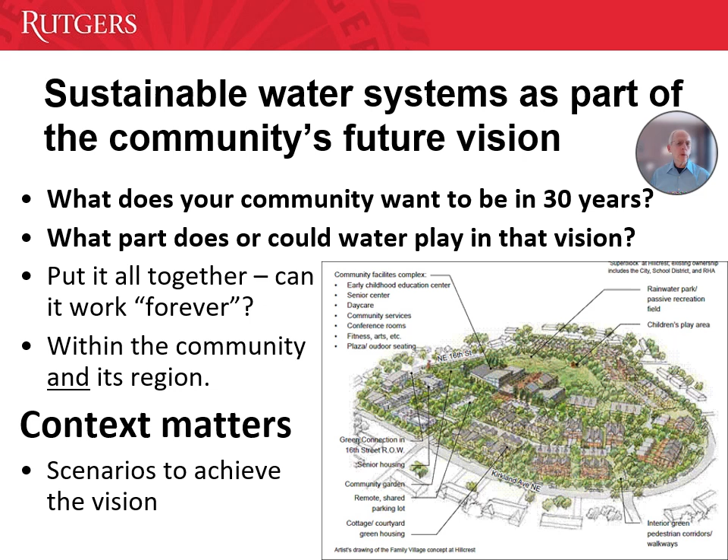So context matters, and one of the things that we can do in water resources management is use scenarios as a way of understanding whether or not we can achieve our vision and whether our vision is sustainable.

So the first question, of course, is what is a watershed? Basically it's the land area that flows to a single surface water outlet. In Westchester County, we're dealing with the Hudson River estuary, so the Peekskill and Haverstraw Bay area, and so on along the west side. Then you have on the far east side the Long Island Sound watersheds, the streams and rivers that run to the Sound directly. And then you have the Croton and Bronx River watersheds, which are especially important in Westchester County because of their historic relationship with New York City.

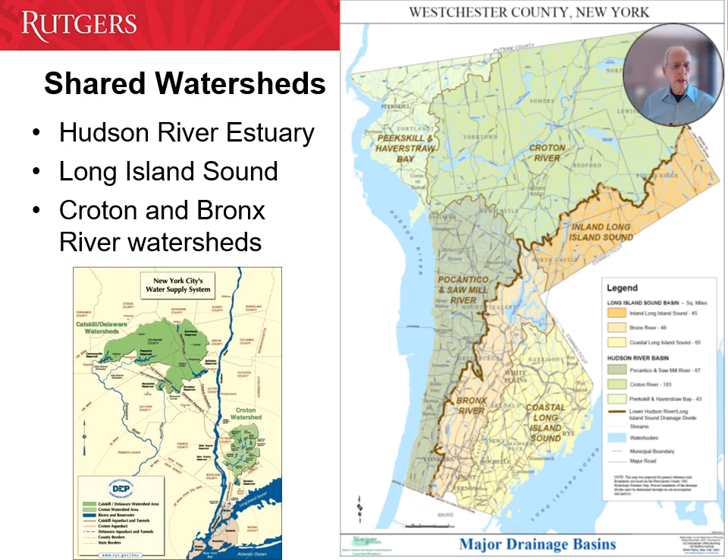One equation, the only equation in this entire presentation, is this one: P equals E plus T plus R plus I. Precipitation is the P. If it doesn't come down from the sky, it's not a water resource that we can deal with. That then moves into the other four parts: evaporation, the water that moves from the land surface directly back up into the sky; transpiration, the water that moves through plants and back up into the atmosphere; runoff, the water that moves directly across the land surface into a surface water; and infiltration, the water that moves down through the land into the subsurface, into what's called groundwater. That's the natural water cycle.

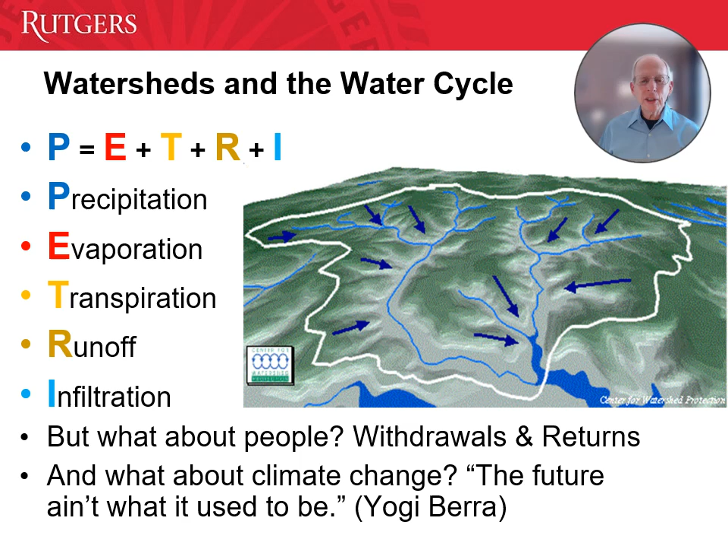People then take from that water cycle. We withdraw water for our own purposes, whether it's potable use in the homes, industrial use, agriculture, lawn irrigation, pools, and so on. And then that water eventually goes back into the system through wastewater treatment plants, evaporation and transpiration, and so on. And then you have the issue of climate change. We know that the climate is changing. We have been measuring it for decades. And as Yogi Berra is quoted as saying, the future ain't what it used to be. So we're going to have to deal with that issue.

A little bit about the New York City water supply system. Back in 1842, when New York City implemented the Croton Aqueduct and started its first major supplies from outside of the city, it was from Westchester County. As part of developing the Croton system, the agreement was that New York City would also supply water to Westchester County, and part of that is from within the county at these reservoirs that you see here. So about 85% of Westchester County residents get their water from the New York City system as part of this deal. And that means that pollutants going into surface waters in the Croton watershed can damage water quality in those reservoirs and part of the Westchester water supply.

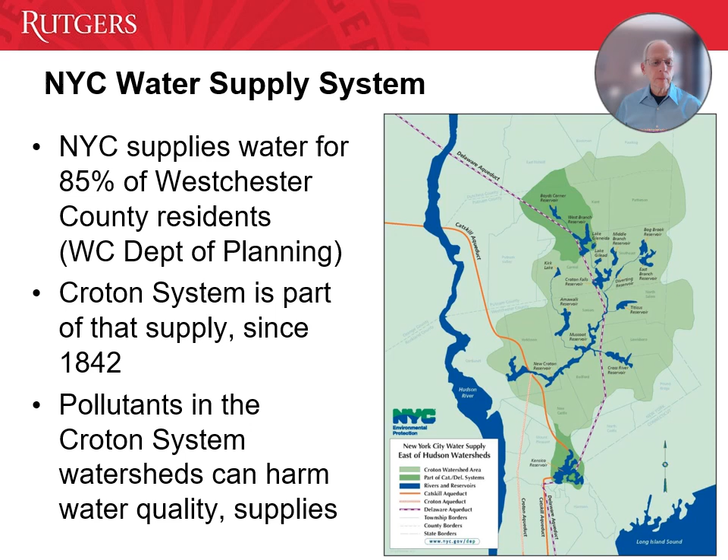So let's take a first look at what we're seeing with regard to climate change. One of the interesting things is that we are seeing more and more of our rain coming in heavier events. Across the northeastern part of the country, it's almost twice as common as it used to be. Total rainfall is not changing all that significantly in this area, but it's coming down in big storms, 2, 3, 4, 5 inches of rain all at once.

On the flip side, the expectation is that droughts are going to become more frequent, at least for the smaller droughts, maybe the less severe droughts. But we're not sure whether the worst droughts we're going to see in the future are any worse than the ones that we have seen in the past, for instance, the 1960s drought.

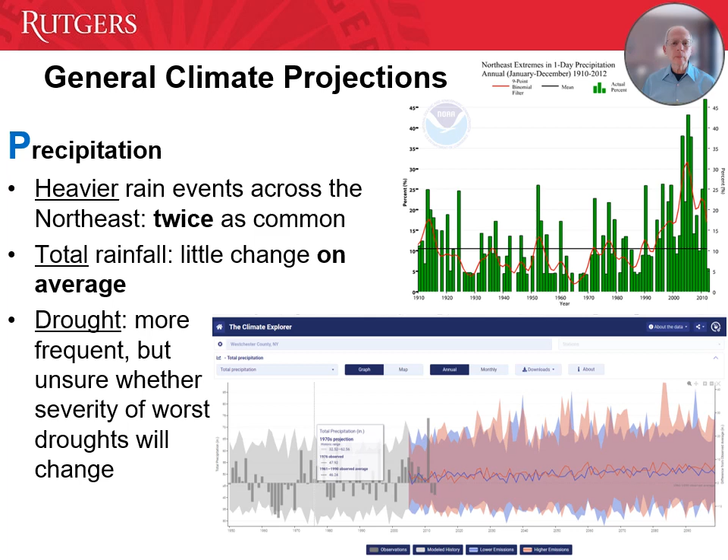With regard to temperatures, it's going up. It's going up in the daytime, it's going up in the nighttime, it's going up faster during the winter months, which we're seeing now in terms of more of our precipitation in rainfall than in snowfall. And all of this means that we're extending the growing season, and that means that we're increasing evaporation and we're increasing transpiration from plants, which has an effect on water supply.

The other thing that we're seeing, and again, this has been documented very, very well, is increasing sea level. So the New York State Department of Environmental Conservation is projecting nearly 3 feet of sea level rise by the year 2100, and that's at a medium projection in terms of climate change. It's not the worst case scenario. It's also not the best case scenario. So if the world gets its act in gear and really clamps down on greenhouse gases, we could see less sea level rise. But a 3-foot sea level rise along the coast is a big issue for these coastal communities.

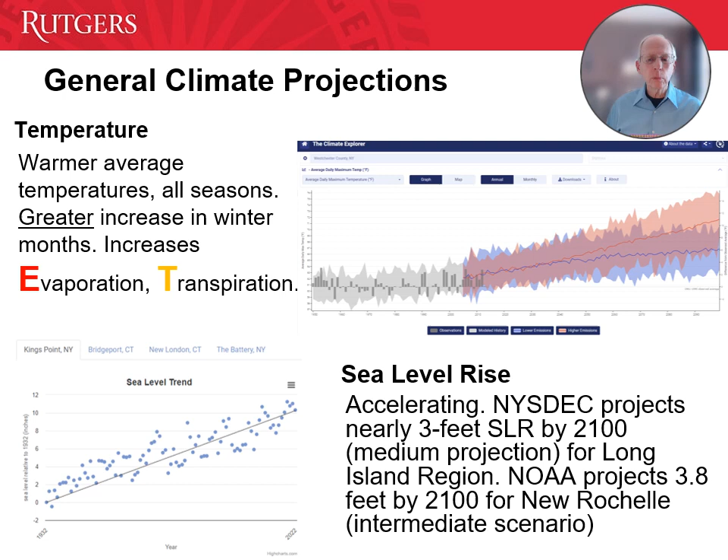When we think about runoff, the R in our equation, stronger storms mean that more of that stormwater is going to run off into our streams, and that is going to create larger peak flows in our smaller streams and rivers. You can see here a graph of the Bronx River at the Botanical Garden, and these large spikes that you see are rainfall events.

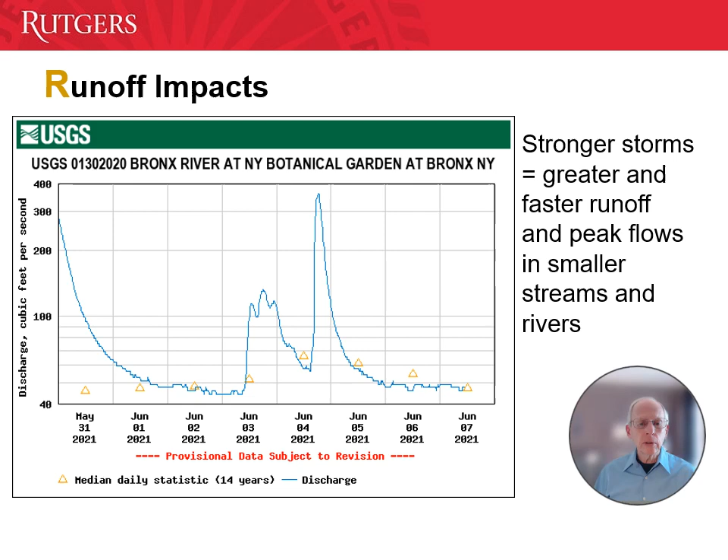And that brings us to infiltration, the final part of our equation. Infiltration is a little harder to understand because it's out of sight, but basically what it means is that water that is coming down is moving through the soil and then finally encounters an area where the soil is completely filled with water. All of the spaces between the soil particles or rocks or whatever it happens to be are filled with water. This is groundwater. And if there is enough groundwater of good enough quality that people can use it through wells, that's an aquifer. So all aquifers are groundwater, but not all groundwater is an aquifer.

That water moves over time to stream systems. And then you discharge out to the stream or out to, for instance, the Long Island Sound or the Hudson Estuary, and then it becomes part of the saltwater system.

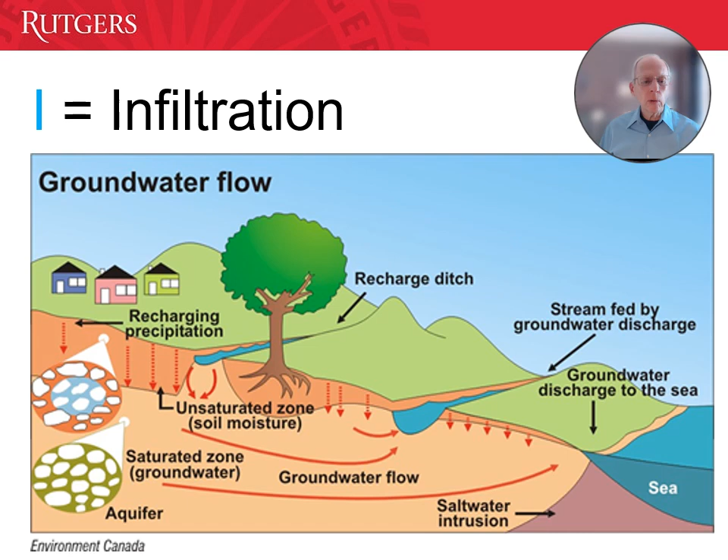So sometimes upstream flows to a gauging station are affected by reservoir releases or wastewater treatment plant releases and so on, and may be affected here at Bronx River. But in general, this is what you're looking for in terms of what's called a stream hydrograph: these low flows are most often groundwater flows.

Development then changes everything. During a natural ground cover, you have relatively little runoff because the land surface is very uneven. There is a lot of vegetation, and so the water tends to stay where it falls. A big chunk goes back up into the atmosphere through evapotranspiration, but then the rest of it goes into the ground through infiltration. As we start developing low density, medium density, and then higher density, what you see is interesting.

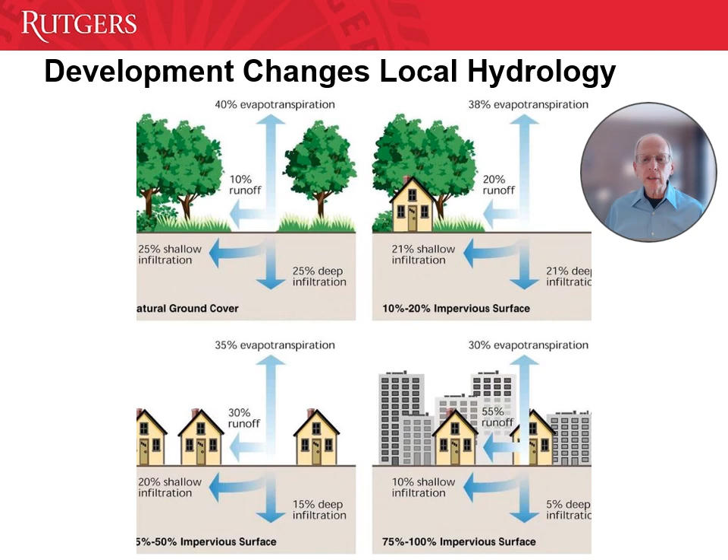You see a great increase in runoff from 10% to maybe over 50% of the water as runoff. You see a significant decrease in infiltration, and you see a bit of a decrease in evapotranspiration. What does that mean? That means that more and more you're going to see peak flows in streams going up, and that means more and more flooding. And it means that the low flows in streams are going down because there's less and less groundwater to support those stream flows.

So let's shift to water quality issues. What is it that pollutes our waterways? And one of the interesting things that people tend not to think about is sediment. Sediment nationally is the #1 pollutant of our streams. Sediment can come from erosion of stream banks, it can come from construction sites, it can come from erosion of stormwater channels, all sorts of different places.

But it has some pretty severe effects on streams because it buries the bottom habitat. All sorts of critters that live in the bottom will then be suffocated. It can change stream structures. It can fill ponds and lakes and wetlands. So for freshwaters and also for estuaries, major impacts from sediment.

And there's a local role that people can play, one of which is to reduce stream erosion. How many people mowed the lawn right down to the water's edge? It's almost like if you don't get your lawnmower wheels wet, you haven't done a good job. Instead of doing that, back up, reinstall natural vegetation, natural species along the water's edge, and reduce the erosion that occurs from that process.

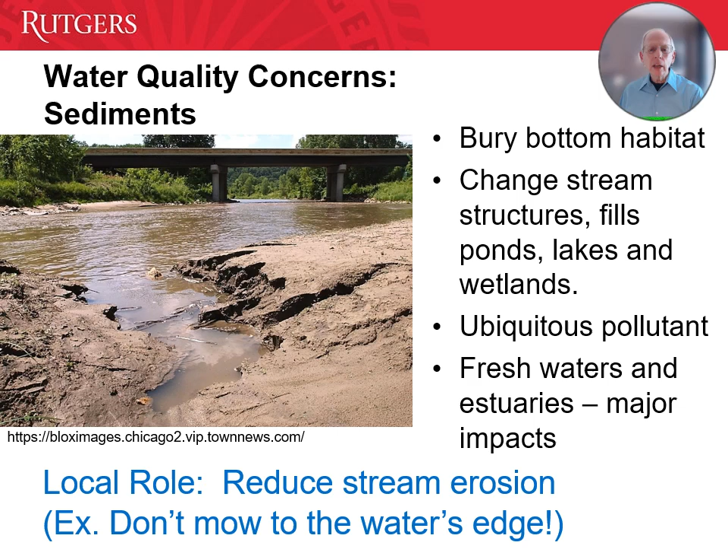Another pollutant of great concern, and this one we see all over the place, solid and floatable materials, everything from plastic bottles to paper wastes from fast food places and plastic bags flying in the air and into our streams. And this has both aesthetic and ecological damages.

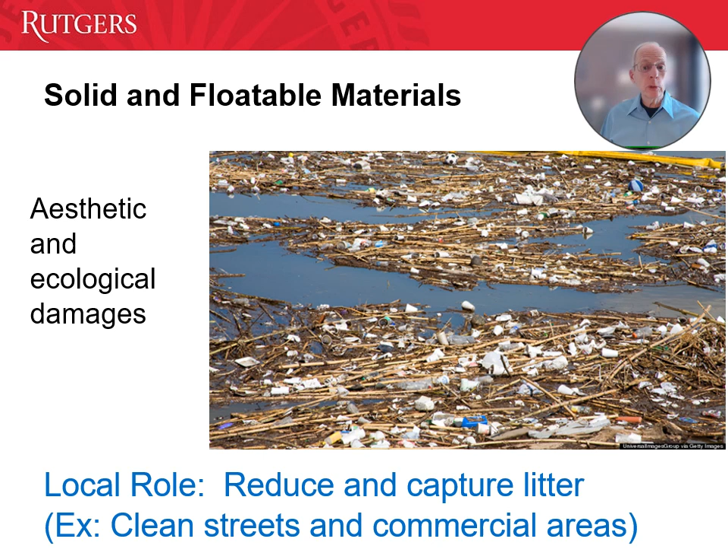So again, there's a local role. You can reduce and capture litter. Clean streets programs, cleaning up commercial areas, reducing the amount of plastic waste. New Jersey, for instance, has banned businesses using plastic bags in many situations. So we're seeing far fewer plastic bags in our streams and hung up in our trees.

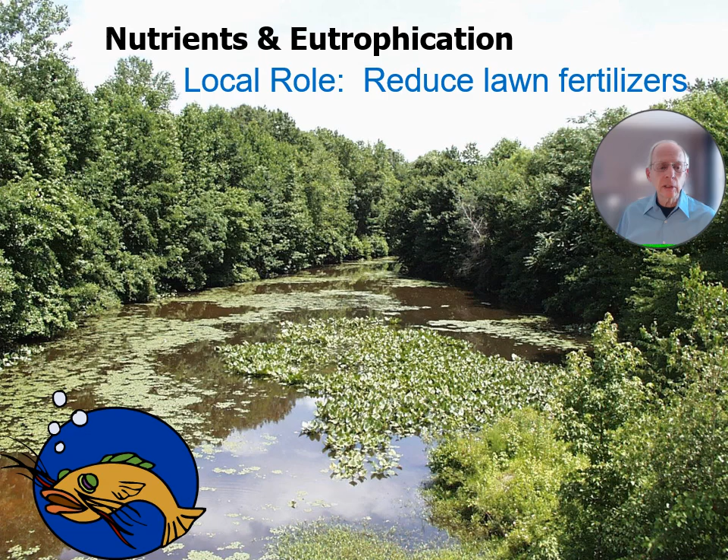Next one, nutrients. So nutrients primarily are going to be things like nitrogen and phosphorus, which are very common in fertilizers. Lawn fertilizers in suburban areas are a big issue, and they can result in this kind of problem where you have far excessive plant growth within the waterway. And what happens is you get the supercharge of oxygen production during the daytime when photosynthesis is happening. And then at night, the oxygen level takes a dive, it can go down to 0, at which point you're starting to kill animals.

Where do these nutrients come from? In suburban areas, it's very largely from lawn fertilizers, especially the phosphorus, where you see these test results from 2012, Rutgers Soil Testing Lab. 56% of the soil tests showed very high phosphorus levels, and another 20% showed high phosphorus levels. So people are over applying fertilizers. And this has been true for basically the whole post-World War II period. Green lawns have become too much of an amenity value, and the result is water pollution and eutrophication, this overgrowth of algae.

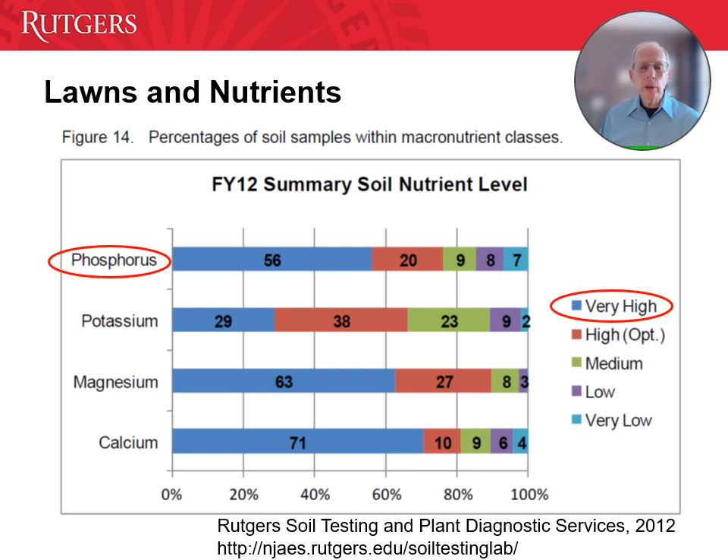Well, the more you cut down, the more unstable the stream banks are on either side, and they fall into the stream. So you're having more and more erosion. Eventually, you get a process where you are stabilizing, and then you wind up with a new floodplain, a new stream channel that is deeper down and wider than the original stream channel. That stabilization process can take decades, and it only really stabilizes once development has stabilized and you're not getting additional levels of runoff.

However, because our storms are getting to be stronger and stronger, even if there's no additional development in an area, we will be getting faster and faster flows within the stream channels, and we're going to get more erosion. So the result is that we wind up with too little water during dry periods because we've reduced infiltration and therefore the stream flow, and we get too much during the wet weather events, and the result is this process.

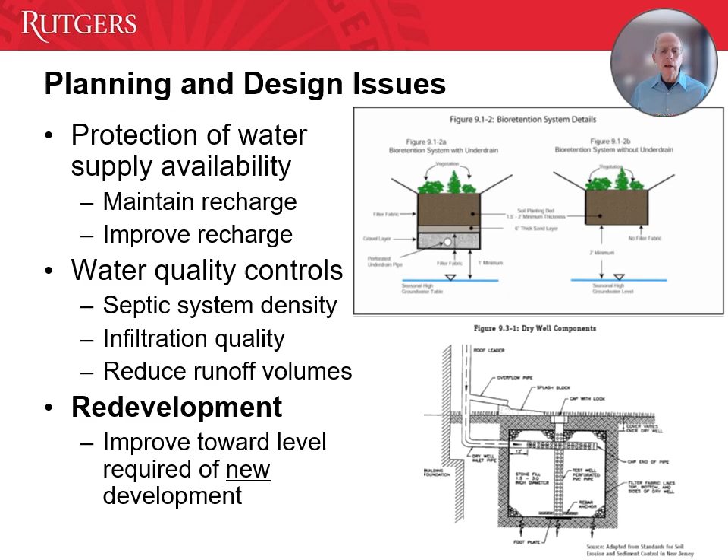And to reduce runoff volumes is also important as a way of maintaining stream structure and water quality. There are many areas, however, that have already developed. Over time, some of these are going to go into redevelopment, especially in urbanized areas. So the question is, how can we design the redevelopment so as to move toward a level of water infiltration, water quality, water supply maintenance that is required of new development, so that we're bringing things back up, we're restoring the ecosystems and the water supplies.

One of the things that we should be careful about is that utilities, our water supply and wastewater utilities, in many places have been in the ground for many decades. They're getting older. They are getting less and less capable of managing our water supply and wastewater needs. We're getting more water main breaks and so on. And so we're going to have to spend quite a bit of money to bring these back up to full

integrity. We shouldn't be assuming that our in-the-ground utilities are going to be able to handle everything we want to do. Additional water supplies, additional wastewater management, additional stormwater. So don't assume it. It's not necessarily going to be a problem, but don't assume that everything can be done. Controlling septic system density, as I mentioned, but of course that's only valid in areas where you have room for additional development.

One of the issues that's important from a wastewater and water supply and stormwater utility perspective is what's called utility service area efficiency. So if you have a mile of pipeline and you only have 10 customers on that mile of pipeline, the cost per customer is much, much higher than if you have 1,000 customers on that pipeline mile. The more customers you have per pipeline mile, the easier it is to get the revenue necessary to maintain these systems over not just the next few years, but over hundreds of years, which is true sustainability.

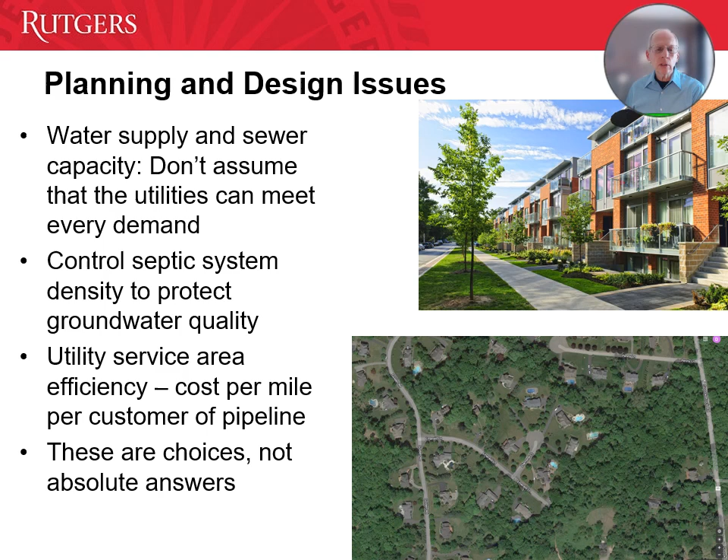So I've mentioned stormwater a couple of times. The thing about stormwater systems is that they're sort of the orphan utility. In most places, the water supply utility has an owner. It charges its customers. The wastewater utility, the sewer company utility, has its customers and they can be charged. Stormwater systems generally are not handled in the same fashion. Instead, they're considered, like the streets, a public work, and they don't tend to get maintained even as well as streets do.

So the municipal separate storm sewer systems, or what are called MS4s in our regulatory language, they're in our developed areas. There are in Westchester County thousands upon thousands of stormwater outfalls, most of them unregulated, and in few places in Westchester County, but pretty much anywhere, are these managed. Why is that important? There are relatively few wastewater treatment plants in Westchester County or anywhere else. There are stormwater outfalls everywhere, and the result is that far more stream miles are damaged by stormwater than by sewage treatment plants and industrial effluent. And that's something that people tend not to know.

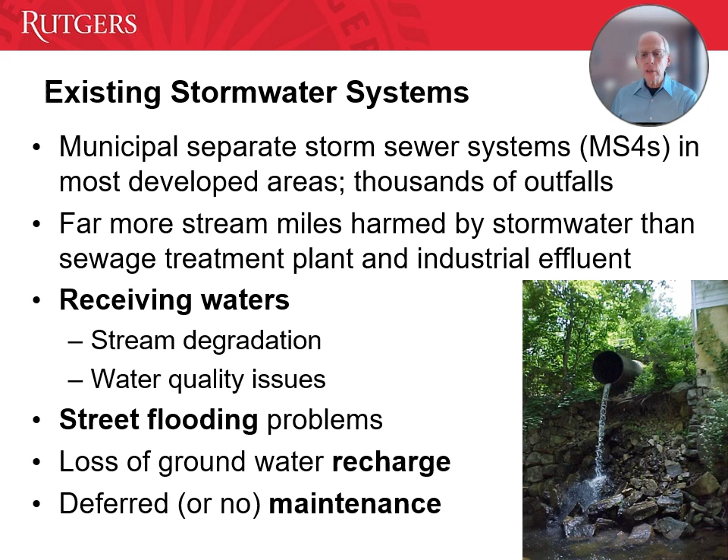So what happens in the receiving waters? Stream degradation, water quality issues. Within the stormwater systems, you get street flooding problems because the stormwater systems were not designed for these larger storms that we're getting. You get loss of groundwater recharge because the water is being intercepted and then moved out to the streams very quickly. And as I mentioned, deferred maintenance, or in many cases, no maintenance at all.

Part of our problem here is that we have old thinking and old technology. So many of our stormwater systems are just a pipe directly to the stream, as you see on the lower right. Then we got a little bit more sophisticated, and we have these basins, detention basins, where the water is held back for a while. But small storms just move straight through them. You have these concrete low flow channels. These are actually fairly destructive to streams also.

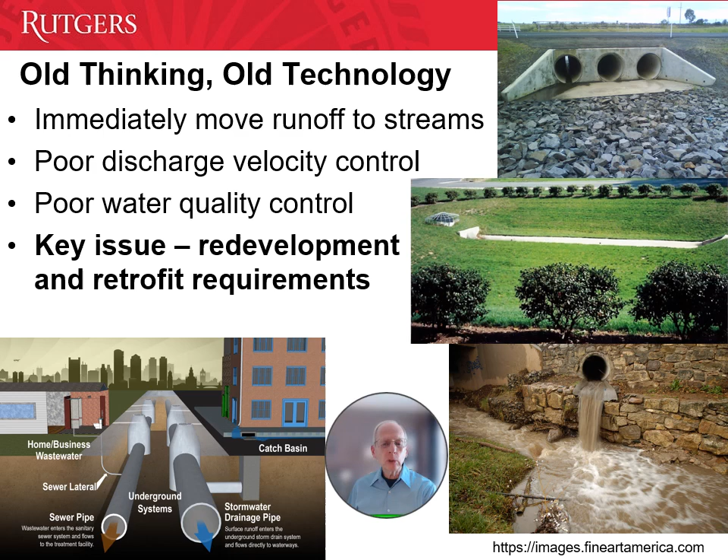And then, it's almost like we were afraid of water. I guess we were afraid of water. We move the water directly from where it falls into a stormwater system and out to the stream as fast as possible. And that has been very destructive. So key issue here is, as we go through the redevelopment process, we can improve the impacts of stormwater on our stream systems and our groundwater. And we can go back and retrofit some of these old systems so that they're more protective of the environment.

We can also do something that was never really thought about in the decades before, and that is to use stormwater as a resource. Instead, we've been thinking of it as a wastewater. Get it out, get it away, take it from us, and put it somewhere else where there's no somewhere else. Our somewhere else is somebody else's there.

So why not use stormwater as a resource, as a way of supporting beautiful plantings, as a way of supporting fountains and ponds and things of that nature. So we can look at stormwater in a very different way, and many places in the country are doing so.

We can look at changing our design storms so that our stormwater systems are capable of handling these larger, more frequent storms. We can deal with recharge protection, water quality controls. We can reduce peak discharge velocities, and we can try to control discharge volumes. And we can use stormwater for amenity values. So all of these things are happening in many places, and they can happen here as well.

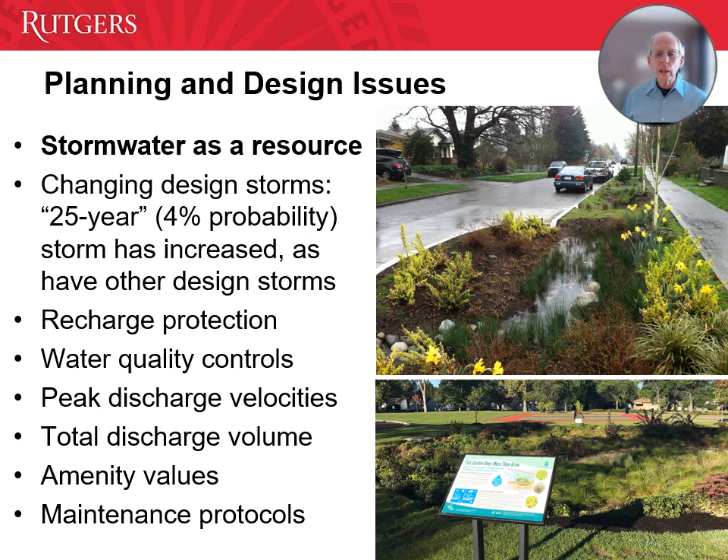Green stormwater infrastructure is the general heading that we use to describe this. The idea is to slow the movement of stormwater, to retain it, to use it, instead of just getting rid of it. It also means managing our stormwater systems as systems, so that instead of having each stormwater outfall as if it was a completely different thing than the next stormwater outfall down the line, we look at all of our stormwater systems, both the intake points, the pipelines, and the discharge points, as systems, and see how they affect the watersheds and what we should do about that.

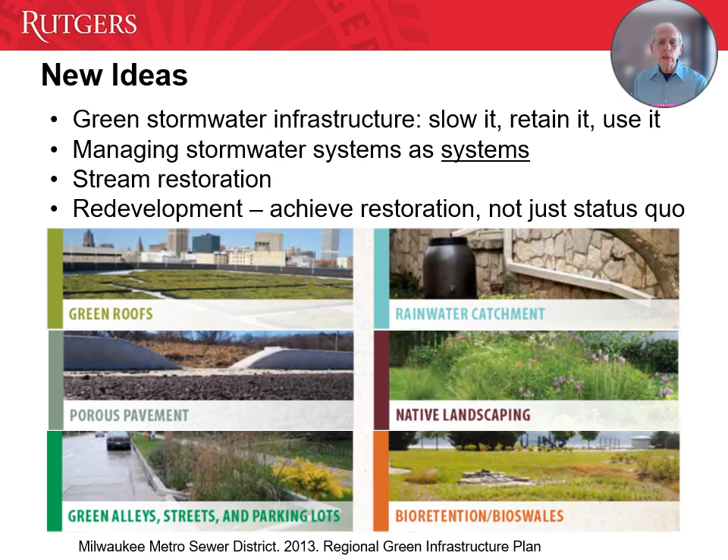That can lead us to restoration of our streams and improvement of the stream amenities. And the idea behind redevelopment is that we achieve restoration. It isn't just a matter of not making it worse, the status quo, but restoring our stormwater management to something that is more environmentally benign.

Despite anything we might do with stormwater, we will have flooding, because flooding is natural. Flooding is something that rivers have done for all of time. The problem is we've put development in those places. So how can we deal with this? There's several different ways we can deal with it. And the local role is basically to work in hazard mitigation plans and implementation.

There are things that can be done at the local scale, at the lot scale. You can do flood proofing of commercial buildings. You can do stormwater redesign when it's a street flooding issue. You can develop flood warning systems. You can do improved flood risk mapping. All of these things will mitigate damages, and from that perspective are very positive.

The problem is there are some pieces of development that simply shouldn't be there. If they're not there now, development controls are a great way of preventing them from being in there. And we should be addressing the floods of the future with these larger storms and not just the floods of the past. Improved stormwater management will achieve some level of control for flooding, but don't let anybody tell you that it will solve your flooding problems, because flooding is natural.

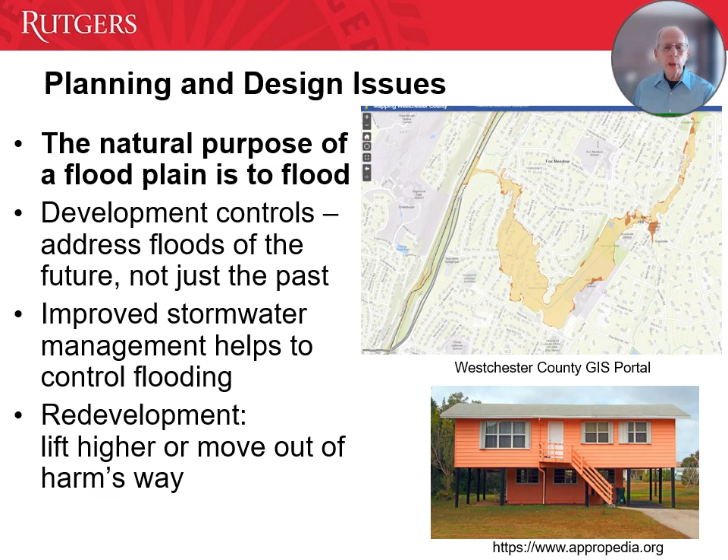So this raises some interesting questions for municipalities. For instance, does your municipality participate in the FEMA community rating system? FEMA is the Federal Emergency Management Agency. They run the National Flood Insurance Program. If your community participates in the community rating system, you can get lower rates for the people who use the National Flood Insurance Program within your community.

The problem is very few municipalities have done this. I took a look, and out of 1,543 New York State incorporated cities, towns, and villages, only 53 are participating in this program. That makes no sense to me. I don't know why it's true. It's true also in New Jersey and many other states. But there's a way of reducing costs to residents. Why not do it? Second question, what about your zoning ordinances?

What about your site plan ordinances? Do they prohibit development in the floodway, the areas closest to the stream? Do they strictly limit floodplain development? Do they make sure that if somebody fills part of a floodplain, that the same amount of fill is taken out of another part of that same floodplain so that there's a balance?

And is your municipality addressing the potential for larger floods that are coming from this climate change process that we're seeing? For those who are in the development process, how will the development avoid future hazards? Not just the minimum requirements to deal with today's floods, but in the future. How will redevelopment reduce flood hazards? Are there access roads to the development that are at risk? You know, it's a really dangerous situation if you can't get emergency vehicles into a developed area during a flood. So what are we doing about that?

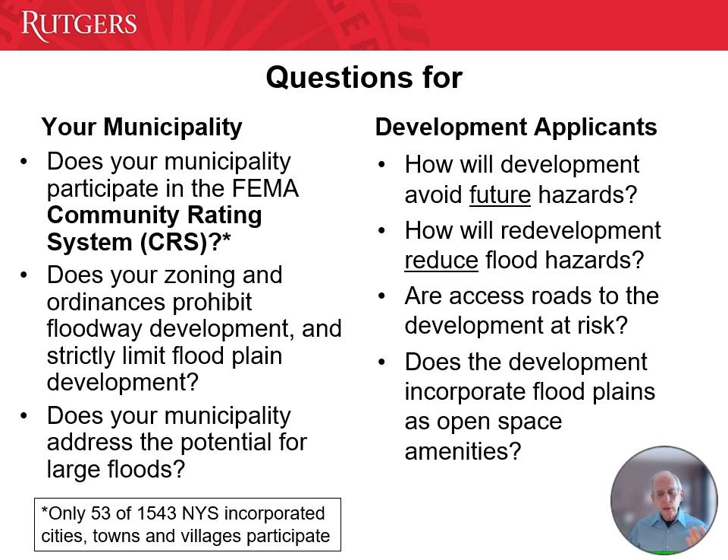And does the development incorporate the floodplains as open space amenities? We can use floodplains for completely valid purposes. For instance, ball fields or recreational areas or something like that. When the flood comes, it gets flooded. Who cares? And then the floods go away and we reuse the land.

Let me talk for a moment about water demands. So water demands in homes have actually been declining over the years. On a per capita basis, they've been going down. And they've been going down in large part because of federal requirements for the use of water efficient plumbing fixtures, and because of manufacturers for things like dishwashers and clothes washers coming up with more and more efficient devices like front-loading high efficiency clothes washers. Tremendous reduction in water demands. So the total demands per capita have been going down.

However, in many places, peak demands are going up. And that's because we're using more and more water for outdoor water uses, lawn irrigation being a primary one. And that's a reaction to these short droughts, to these higher temperatures during the daytime. And so we're getting higher peak demands, but lower overall demands. And so the idea here is to figure out ways of conserving water in a way that will work for everybody. More efficient lawn watering devices, for instance, so you're not going to have an issue where somebody is watering their lawn while it's still raining. We've all seen that. So water conservation, in the outdoor uses especially, can be very valuable.